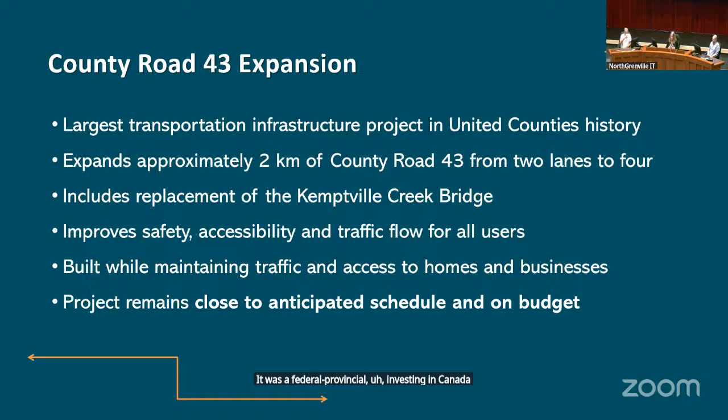So this is a big deal. The project is supported by 4 levels of government: municipal, county, provincial, and federal. Some of you may recall we received a grant for just under $10 million, from the federal-provincial Investing in Canada's Infrastructure Program. It was a shared $10 million grant provided jointly by the federal and provincial government. That offset some of our costs, but the rest is being borne by the counties and the municipality. I'd say it's about $10 million for the municipality, more or less, and the rest is being borne graciously by the United Counties of Leeds and Grenville.

I will recognize a former mayor in this room. Where are you, Doug? Doug Struthers. He was certainly around the county table for many of these conversations about the urgency of updating what was effectively a failed road for many years. Some early planning had been undertaken back in 2010 to envision what the road would need to be, and it effectively took us 10 or 11 years to get there. I want to thank Doug and other members of County Council who all came on board and unanimously supported the need for a very large investment in Kemptville. It was a necessary investment, I might add, but nonetheless, it was great to have their support. And it is the county's largest road infrastructure project, so it's a big deal.

Before I move on, I will say that I think our businesses as well as residents overall have shown a tremendous amount of patience for what is a 3-year road rehabilitation project. We recognize that it has obviously been somewhat disruptive in all sorts of ways.

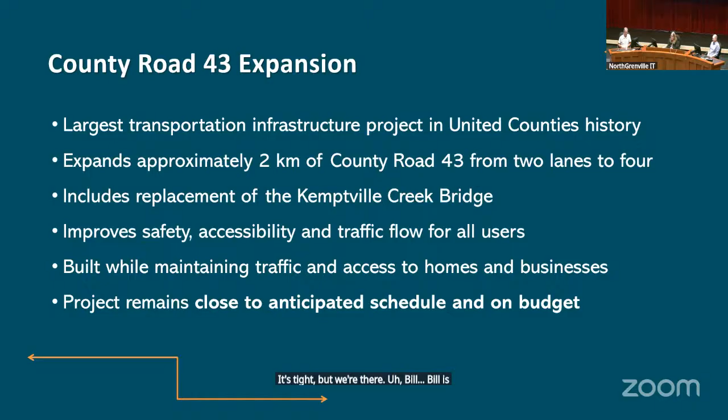And we are on budget, still on budget, which is really very crucial. So it's tight, but we're there. Bill is an assiduous watcher of all dollars spent on this project, and I assure you, nothing gets spent without his full approval and very, very close oversight.

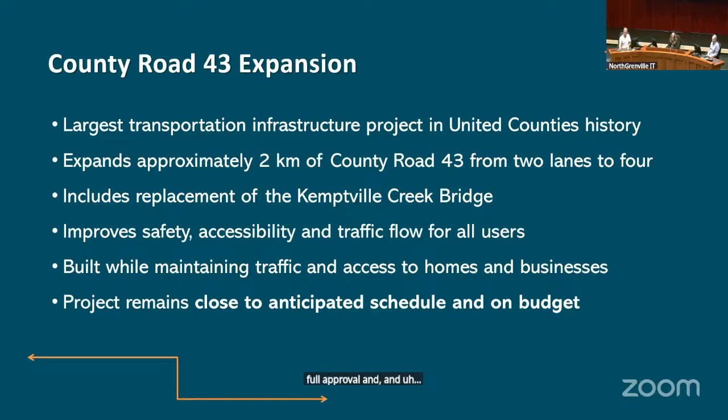When we did phase 1, it took us 2 nights to do it. For phase 2, we had the same crew, the same guys, the same crane operators, and they did it in a night. So it worked out better. They got better the more they did it.

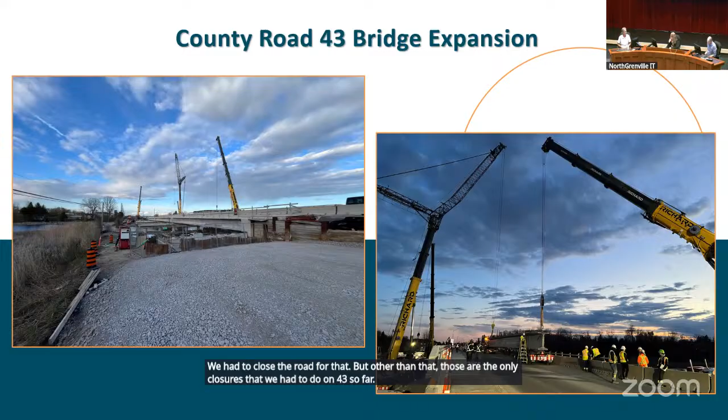Because when we first put it in, we have a lot of weight on the first phase of it—we have asphalt, sidewalks, barrier walls. We don't have that same weight on phase 2 yet, so they don't quite line up. As we get more weight on it, they will. So that strip down there is called a closure strip, and that ties the two together once we're ready to do so.

Bill, will it be a seamless 4 lanes? Will there be any delineation between the two halves of the bridge? There will be a median, a concrete median, between them, yeah, on the bridge itself. And actually, the median is in place now—we already have that constructed. We did that in the first phase. We put an extra set of girders in on the first phase so we could construct the median.

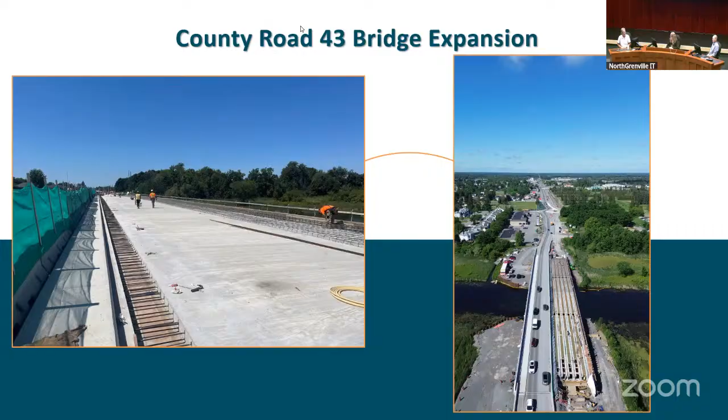Streetlights have been a bit of an adventure, really, to be honest. Dealing with hydro, we have multiple feeds for the lights. One feed will take care of the lights in this one section. I think on the Shoppers side of the creek, we have 4 feeds. They're all connected, but we don't have all the lights connected to them. It's a process to go through hydro to get permission, to get an inspection, and then to get permission to hook them up.

So piecemeal, we've been getting them in there. Plus with our construction, when you get down near Anniversary Way, because County Road 43 has to tie into all 4 lanes of the bridge, we couldn't quite finish off that roundabout at Anniversary Way. So there's a little bit of roadway out there that's not quite built yet, which also affects the streetlights. There's a couple of streetlights that are out there too.

Now, naturally, those 2 streetlights are key to the feed, so we have some streetlights at that end that aren't working because of the missing lights. But we're getting there, bit by bit, they're coming.

We're putting the lights in now as we go on the other side of the creek, on the Colonnade side, on the east side of the creek. So a lot of the light standards are in, and the poles will go up once we're finished more of the road work and things like that. There's less feeds over there too, so we should have those lights going sooner.

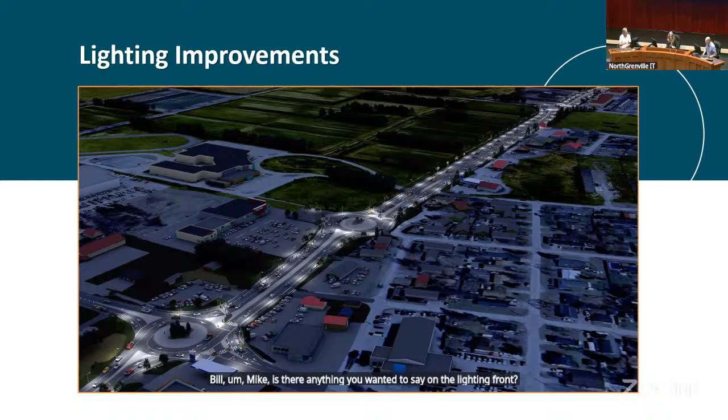Bill, Mike, is there anything you wanted to say on the lighting front? Anything to add? Okay, Ronnie, next slide.

We did have access closed to the north side on County Road 19 north of 43 for one day, and we did the same thing south of 43 for a day. But we had Tomlinson in, and they worked 48 straight hours to get the road graded and paved so that we could reopen it as a roundabout. Tomlinson has been really good that way about accommodating and helping us minimize inconvenience for residents. It was a long and involved process out there, we were there for quite a few weeks, I'm sure everybody knows, but it's a lot of work. And we still got to do the same thing at Colonnade.

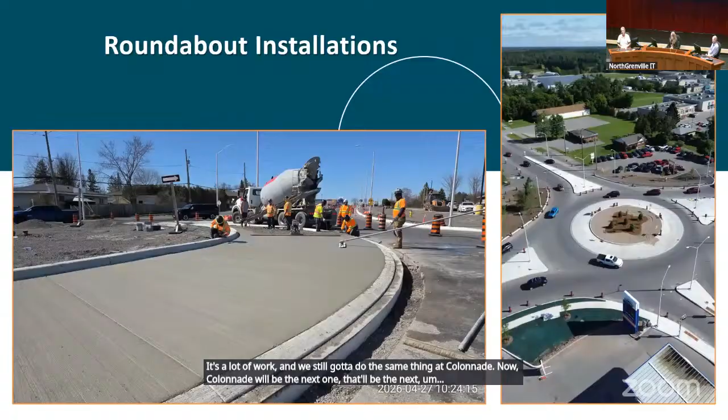Colonnade will be the next one, that'll be the next major inconvenience for anybody. The roundabout at Colonnade, yeah, but it should be a little quicker because one thing about Colonnade is we're saving the circle, we don't have to take the circle out there, so that'll be quicker. The problem with the Colonnade roundabout was the accesses in and out, you could get into that roundabout too easily. The jogs in the roundabout are basically to slow you down, that's why it does those jigs and jogs in there.

When the Colonnade roundabout was first built, it didn't have that in there, so you could enter that roundabout at too high a speed. So we're readjusting the concrete medians on that one to slow you down coming into there, especially coming off the highway. I don't know if anybody is like me, it takes me a while to get rid of highway speed once I get off the highway.

And Bill, of course, there's the one in front of Stinson's and Kemptville Retirement Living. Yes, that's forthcoming, that one will be a little later in the year. We need more of the bridge to be able to tie into it on that one. We're probably looking at late September, early October for working on that one. We're probably looking at getting the two lanes of the bridge open late fall, tying the bridge into everything late fall, so probably the same time this year as we opened last year, sometime in November.

I should highlight, in terms of the roundabout in front of St. Mike's High School, mid-year, in close collaboration with Mike and Bill, we decided to retain a crossing guard, recognizing cars were getting used to roundabouts, kids are getting used to roundabouts, and that is one of the primary crossings for kids in the community. So we brought in a crossing guard for 90 minutes in the morning and 90 minutes in the afternoon, and we got lots of great feedback regarding that crossing guard, and they're being retained for another year as the community adapts to all these roundabouts and kids get to know what they need to do. It was one of the areas where we heard a lot from parents and the school about how to better ensure pedestrian safety.

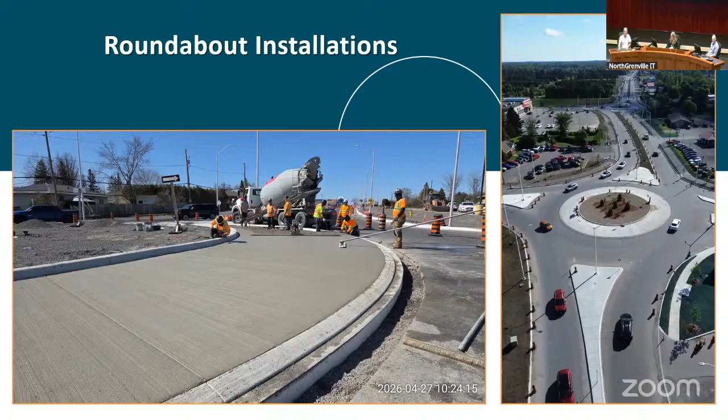One thing we've noticed working out there over the last 2 years is that people are getting used to what's going on out there. There was a lot of confusion, but people are getting used to it, and it'll only get better. We've left the barrels and things out on the west side because we still have to put another lift of asphalt in there, then get the lines down and get the symbols painted before we open it up to the 2 lanes. So that's kind of where we're at with that.

Hopefully we're looking at getting that done very soon. That'll be done in the fall for sure. We're pushing to try and have that done before school opens, so hopefully we can meet that target.

As you've noticed, we've got some landscaping out there again on this side of the creek, too, on the west side. The intent is to get everything finished: get all the landscaping in there, which is mostly in now, get the asphalt fully paved, get all the lane markings in there, and get all the symbols in for the roundabouts, pedestrian crossings, et cetera. We're making good progress towards that too. So that's what we've got here.

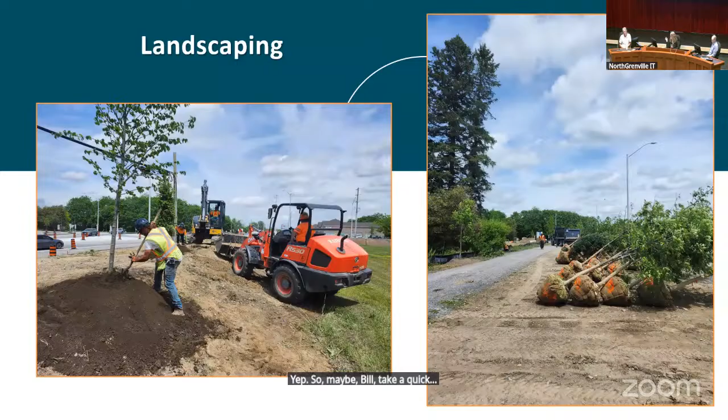For the entire project, we're looking at the end of July in 2027. So we should be packed up and moved out of there by then, provided everything goes well.

And speaking of that, looking ahead, what's to come? We do have the final paving and the line painting on the west side of the bridge, the Shoppers side of the bridge, St. Mike's. Like I say, we're trying to get that done before school opens - that's the intent, but time's moving fast.

With the completion of the remaining landscaping, there's only a little bit left. There were some things we had to do - we actually had to remove some of the multi-use pathway, and it has to be put back in again. So there was some landscaping that couldn't be put in yet. That'll be put in once the remedial work is completed.

So that's pretty much it for this side of the creek. The plan is to have the west side of the creek all up and running, at least as far as the Anniversary Way roundabout. We don't know yet if we're going to put it to 2 lanes. We're still discussing that, it depends. We might not do that until we open the other 2 lanes of the bridge, because it can be confusing moving barrels in and out, and once we start moving them out, people don't want to see them come back. I know I don't.

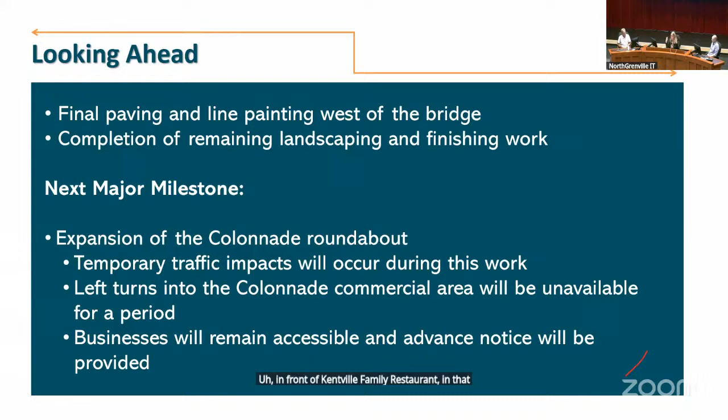To Bill's point, certainly some businesses feel like the median in front of Kemptville Family Restaurant in that area is a little bit of a deterrent. The sign was put up to cue drivers that there's a way to get across - you just got to go up a little bit further and come back down.

We have been working with County Road 43 businesses through a quarterly business breakfast meeting and lots of information sharing to do what we can to support them through the municipality and counties working together. We also put in a tax deferral program to support any business who felt they were taking a bit of a hit given the protracted nature of the construction, and we've had a little bit of uptake on that. It's not a forgiveness program, it's a deferral program. But we acknowledge that in a couple of cases, businesses may have felt they were being impacted, not over the course of a whole year necessarily, but at the height of the construction season.

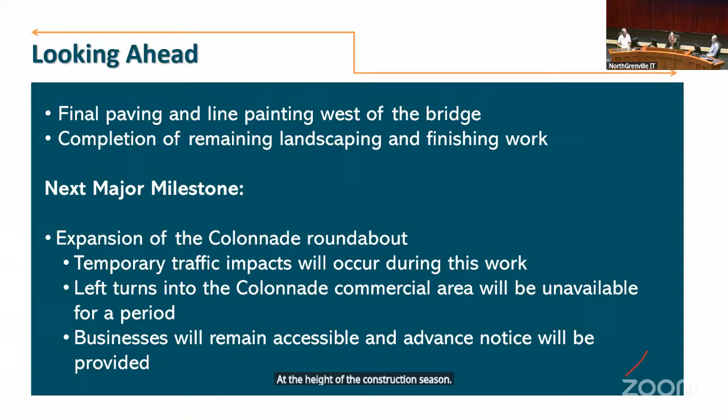So the question is, will there be sidewalks on both sides of County Road 43? On the business side, absolutely. I'm going to refer that to Bill - I think you saw someone else trying to get into the Zoom room. So Bill, do you want to talk about multi-use pathways, and then we'll go to Mike?

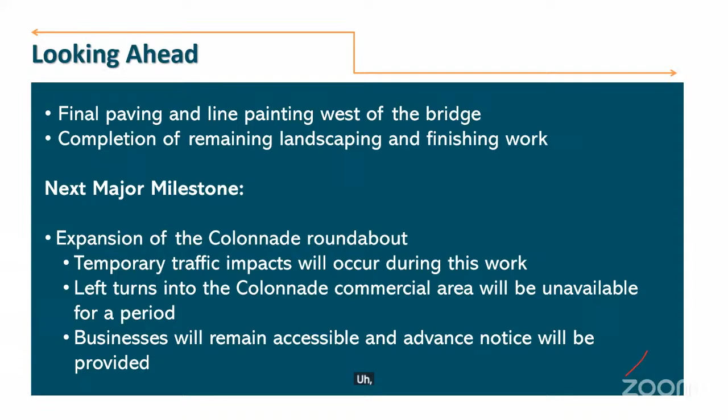Yep, there will be. I'm sure they're referring to the one we removed - yeah, so they will be put back in, hopefully before school opens. The delay right now is that there's a few curb repairs that have to be done too, there's some deficient curb. We've been keeping the curb subcontractor up around 19 right now to try and get all that out of the way and get the curb in the entrances for the businesses up that way. So they haven't actually got to the deficiencies yet, and now they've finished because they had commitments elsewhere. So we're looking to get them back in a couple of weeks to get the deficiencies in and get those multi-use pathways put back in.

On the east side of the creek, yes, there will be multi-use pathways on both sides, at least as far as Colonnade anyway. And then there'll be no multi-use pathway on the north side.

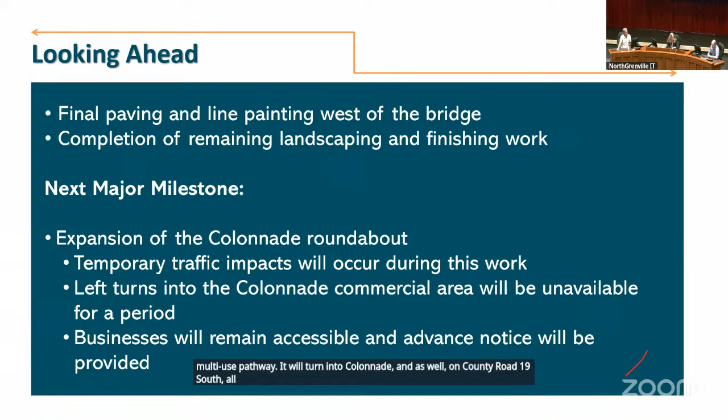Mike, do you want to add? Yeah, once we get past 19, it's only on the south side for the multi-use pathway. It will turn into Colonnade, and as well on County Road 19 south all the way to Ryan's Well, there'll be a sidewalk from 43 to Ryan's Well on the west side. So that'll help for people walking in that area as well.

We were really excited by the addition of the County Road 19 sidewalk, which hadn't necessarily been envisioned as part of 43, but we were able to capitalize on the fact that we were doing 43. Obviously, so much traffic going in and out of the Colonnade Shopping Plaza and no real safe way for pedestrians to go up and down County Road 19. And we've got those new apartment buildings behind Giant Tiger, so lots of activity. So having the opportunity to build the sidewalk was, from our perspective as a municipality, really crucial. We're very happy to see that being built around the same time.

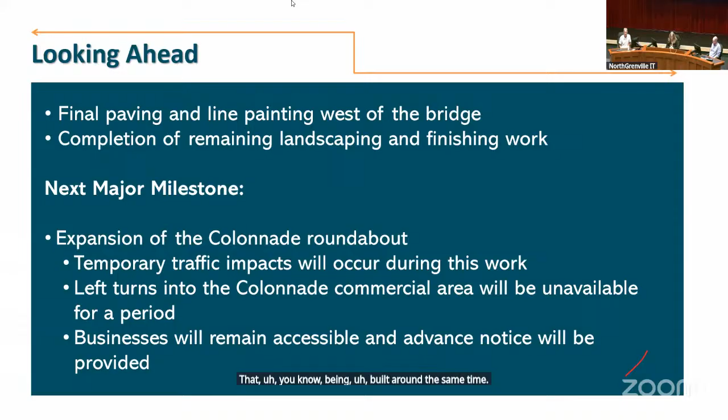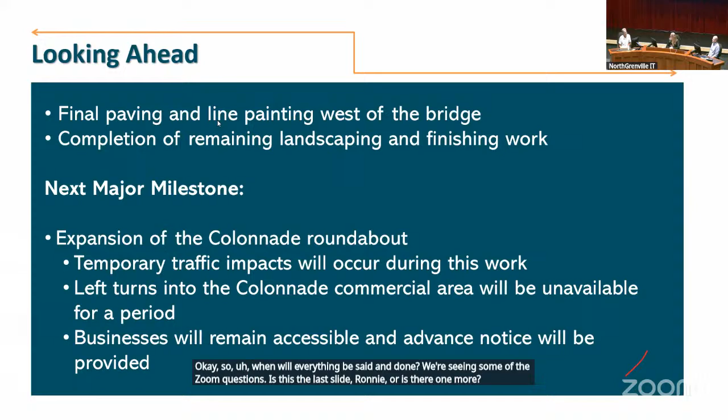Okay, so when will everything be said and done? We're seeing some of the Zoom questions. Is this the last slide, Ronnie, or is there one more?

Before we go to the questions from the Zoom room, we invite you to ask any questions.

Mike, do you want to speak about the very significant underground works executed on behalf of the municipality? Anytime you rebuild a road, what I've learned is that you look underground to see what aging infrastructure is likely in need of repair or replacement. As the road was being rehabilitated, it became obvious to Mike and his team that there was an opportunity to do some really important work that would serve residents, not just on the 43 corridor, but throughout Kemptville and beyond for decades to come. So Mike, maybe speak a little about that.

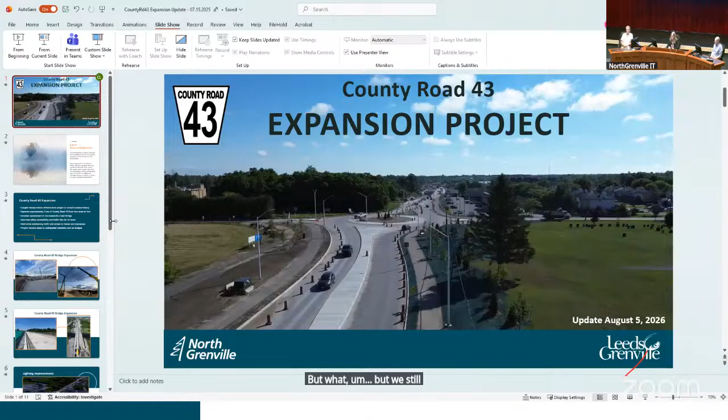But we still have to put an apron in there, so we will be undertaking that probably starting next week. The plan is to put all the traffic on the south side, on the Colonnade side of the existing roundabout right now, have two lanes of traffic down there and work on the north side, get it graded and built and ready for curb, and then move to the south side and put the traffic back to the north side.

This is a bit of a challenge at Colonnade, and we have to do some dancing around back and forth. But we figure we've got a pretty good plan, and we'll put some good notice out ahead of time. We're trying to get as much done from the north side as we can, because once we get to the south side, that's the south side of the existing circle, the Colonnade side of the existing circle. That's good.

No, we're not going to do that. No. No.

Other questions from the floor before I return to Zoom? Yep, we got one up in the theater. I have some concerns about accessibility on the 43.

I noticed some of the crosswalks, in the median on the 43 and the 44 Rideau, have about a 1 or 2 inch curb for people to step on or over. And it can be an issue for someone that has a wheelchair or someone that's blind and may not be able to detect there's a curb there, if anybody's seen it before.